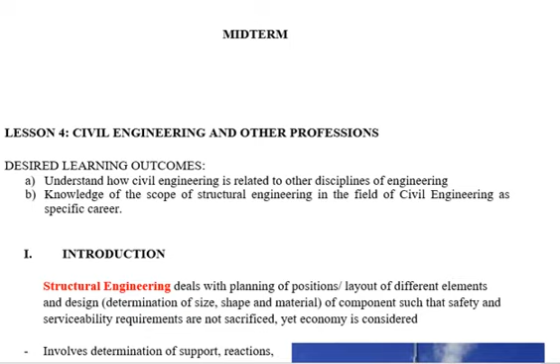Structural engineering deals with planning of positions, layout of different elements and design, determination of size, shape, and material of components such that safety and serviceability requirements are not sacrificed, yet economy is considered. It involves determination of support, reactions, member forces and moments, deflection and deformations.

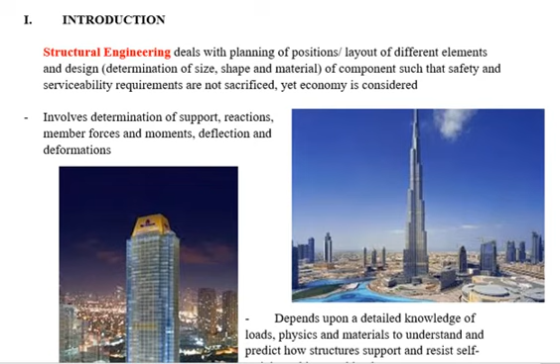As you go along in your higher years, there's a subject called structural analysis and design. You will be familiar with the terms support, reactions, forces, moments, deflection, and deformations. These are mostly what a structural engineer computes or analyzes for an infrastructure.

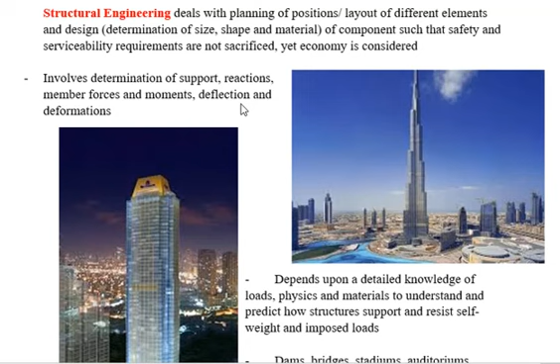Okay, so this picture is one of the tallest buildings in the whole world. I think you're familiar with this building. It's called the Burj Khalifa, located in the Middle East.

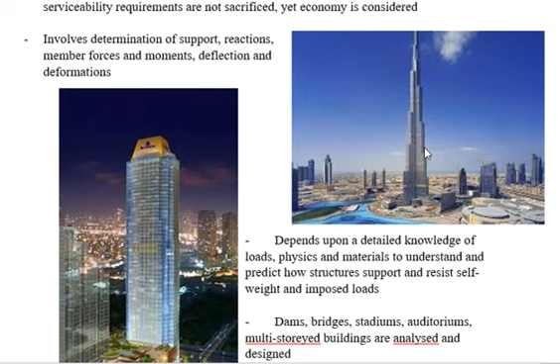Structural engineering depends upon a detailed knowledge of loads, physics, and materials to understand and predict how structures support and resist self-weight and imposed loads. So you should be knowledgeable about loads, how they are computed.

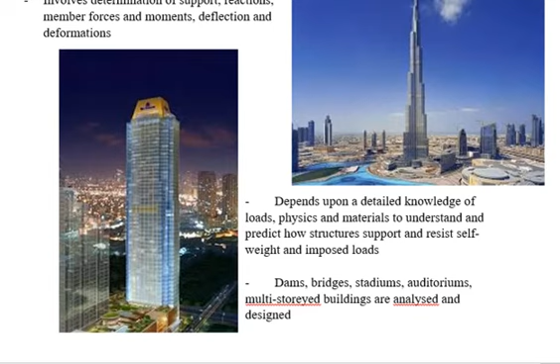So iyon ang halimbawa ng importance ng isang structural engineering. So dapat ang isang building, kahit gaano pa siya kaganda, makatayo siya sa sarili niyang mga paa. Which is, paa is pundasyon naman sa structures. So iyon yung importansya ng structural engineering sa construction.

Okay, so let's go to structural engineer. Structural engineer ensures that the design satisfies a given design intent predicated on safety or serviceability, and is responsible for making creative and efficient use of funds and materials to achieve these goals.

Okay, so who among you wants to become a structural engineer? Meron ba? I hope sana meron. Kahit at least mga 5.

So when you choose structural engineering or a structural engineer, most probably yung mga company na pwede nyong applyan is mga consultancy firm na mga company. Usually sila international base, nag-o-office lang sila sa Philippines pero yung mga company is international na mga pangalan, which is nagde-design sila ng iba't ibang mga infrastructure around the world.

So yun nga, as structural engineer dapat i-satisfy mo yung mga set of standards or codes galing sa iba't ibang mga agency, gaya ng Building Codes of the Philippines, then may mga codes din from National Structural Codes of the Philippines. Meron din yung mga sa Association of Structural Engineer yata, meron din mga codes na sinusunod.

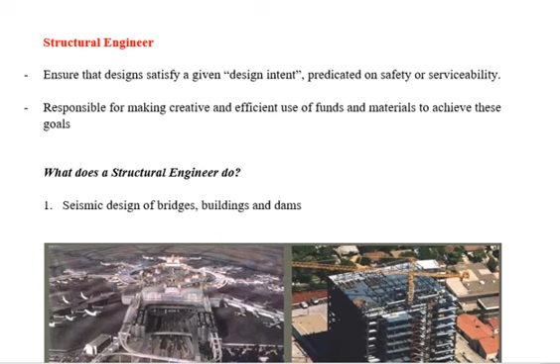So what does a structural engineer do? Number one, ginagawa nila is seismic design of bridges, buildings, and dams. Dapat yung mga bridges, buildings, mga dams na tinatayo can withstand the seismic or yung mga earthquake load. Kumbaga pag dumating ang isang lindol, hindi siya basta-basta bibigay o magko-collapse.

Kasama rin dyan dapat yung sa tinatawag na liquefaction, kung saan yung lupa is masyadong saturated na pwede siyang mag-cause ng collapse once na magkaroon ng lindol. One example of liquefaction is katong may isang building somewhere in Manila yata na after lumindol nag-collapse siya sa pundasyon. But yung structure mismo is buo pa rin. Ang bumigay lang yung pinaka ibaba o pundasyon. That's because of the liquefaction.

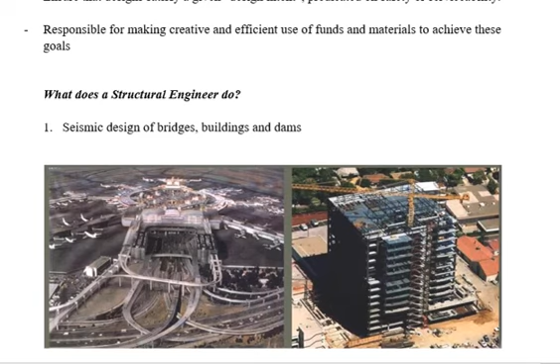Daming pressure, no? Then pag nagka-earthquake pa, dapat kaya niya yan i-withstand lahat, kumbaga dapat hindi siya basta-basta tutumba. Sobrang daming pressure. Kaya nyo ba yun? So ano sa tingin nyo? Okay ba ang structural engineering?

So try to evaluate yourself kung okay ba siya para sa inyo. Kumbaga malaki ang kitaan pag structural engineer ka, kasi limited lang, kakaunti lang ang nagiging structural engineer sa Philippines. Halos karamihan ng mga civil engineer pagka-graduate o pagpasa ng board exam ay andun sila sa mga general applications ng civil engineer. So iba talaga pag meron kang specialization o under ka sa specialized structural engineer.

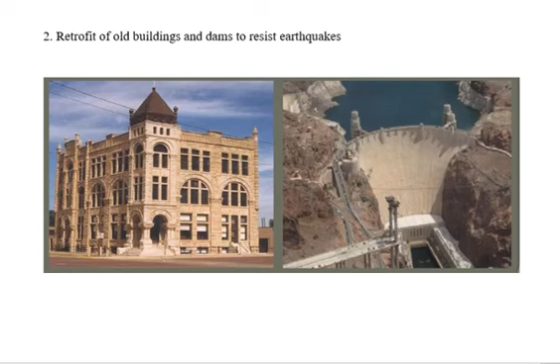Okay, so next, brief history. Structural derives from the Latin word structus, which means to pile, build, assemble. Parang Lego, pile mo muna, build mo, then assemble. The first use of the term structure was dated c. 1440. So structural engineering dates back to 2700 BC, before Christ, when the step pyramid for Pharaoh Djoser was built by Imhotep. So this is the step pyramid.

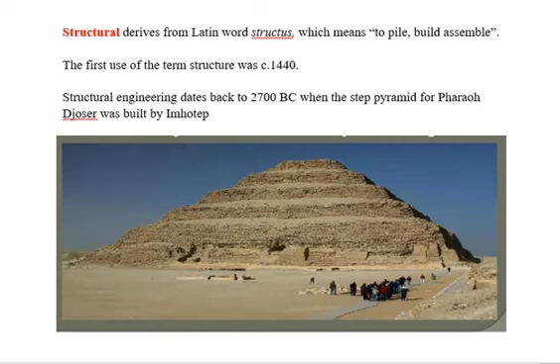Okay, so next - who is the pioneer of the use of iron in structural engineering? That is Mr. Gustave Eiffel. One of the structures he built, which I think you're familiar with, is in Paris - a famous tourist attraction called, from his name, the Eiffel Tower.

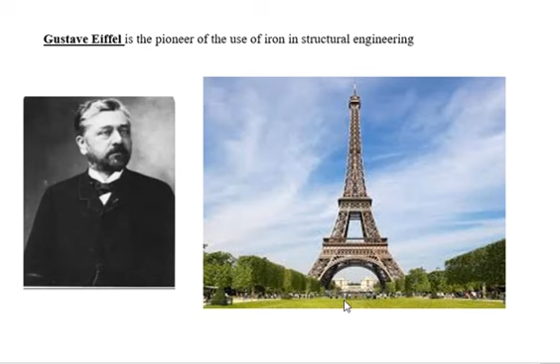Okay, so next - structural analysis. When you go to your higher years, you'll have a subject called structural design or structural analysis. This is mostly what a structural engineer does. In structural analysis, it's about developments in understanding materials and structural behavior.

In the later part of the 20th century, developments have been significant, with topics such as fracture mechanics, earthquake engineering, composite materials, temperature effects on materials, dynamics and vibration, fatigue, creep, and others. The increasing range of different structures and their increasing complexity has led to increasing specialization of structural engineers.

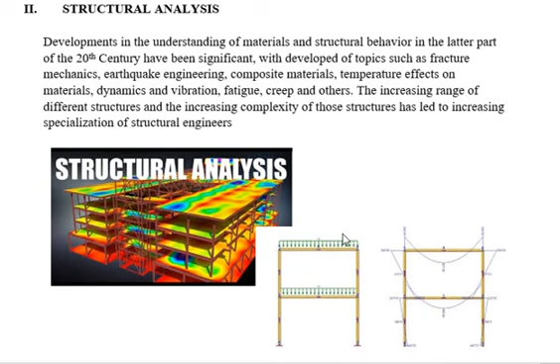Okay, let's go to structural failure. Structural design for a building must ensure that the building is able to stand up safely, able to function without excessive deflections or movements which may cause fatigue of structural elements, cracking or failure of fixtures, fittings, or partitions, or discomfort for occupants. It must account for movements and forces due to temperature, creep, cracking, and imposed loads.

For a system that obeys Hooke's Law, the extension produced is directly proportional to the load. If it exceeds this, the structure is called a failure structure. So usually during design, one of the computations is the load that gets analyzed.

So kapag nag-design ka, dapat yung mga members mo, structural members or elements, can withstand those loads. Dapat kaya niyang i-carry. Kumbaga sa tao, ano lang yung maximum na pwedeng buhatin ng isang tao, which I think times 2 lang sa kanyang weight. Kung times 3 na sa weight ng tao yung kanyang dinadala, ano mangyari sa tao? Magpipeli siya, babagsak. So ganun din yung structural failure. Kung ano lang yung kaya niya, capacity niya na i-carry, yun lang yung dapat. Pag sumobra doon, magkakaroon na ng structural failure.

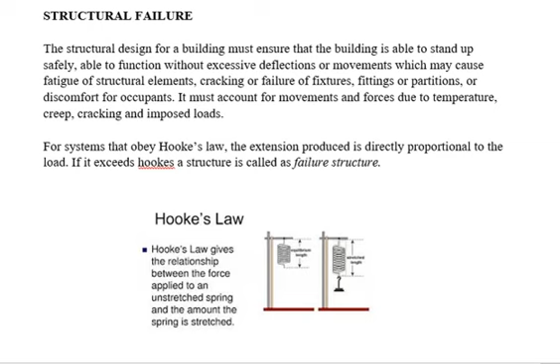Okay, so next. Structural elements - these are some examples of failure modes. So we have the stress. Ito yung mga modes of failure: deflection, buckling, creep, fracture, wear, and yielding.

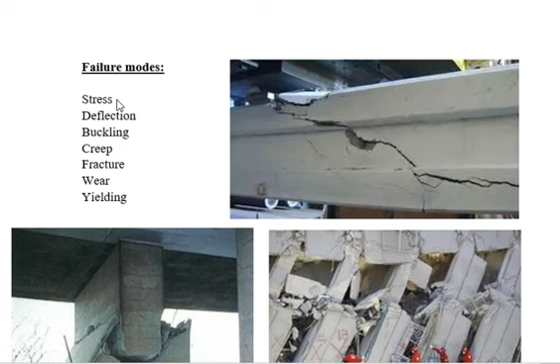So stress, kapag na-stress ka na, nagkakaroon na ng failure. Tama? Yes, so huwag ka magpapa-stress.

Deflection. Itong mga modes of failure will be discussed to your higher years sa inyong design, so we will not go into details. I will just show you some examples of those failures.

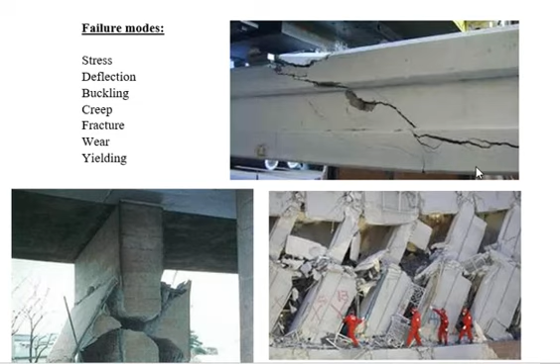So kita nyo yung beam, nagkaroon ng crack, which is due to stress, wear, or yielding. So ito naman yung poste, bumigay yung kanyang sa gitna. Then this structure, yung mga columns din niya bumigay. So this may be because of earthquake.

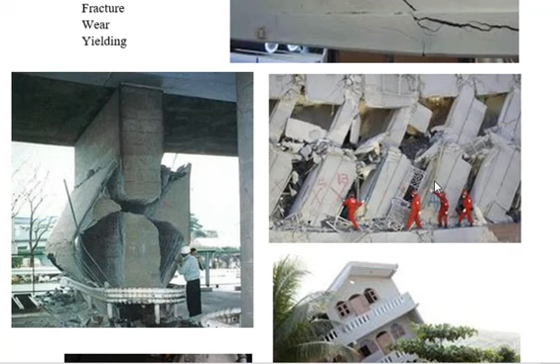Okay, another failure modes, so ito. Yung beam din, ito, buckling and yielding and creep. Sama-sama siya dito. Then etong bahay, ang tibay nung structure niya, pero ang bumigay sa kanya is yung kanyang pundasyon. Maybe that's because of liquefaction or yung soil bearing capacity ng lupa is hindi sumobra.

Then this other picture is naman sa bridge. So hangga't maaari, ito yung mga iniiwasan na mangyari ng isang structural engineer. Pero meron yung mga time na hindi maiiwasan na kahit gaano kalakas or yung design mo, bibigay at bibigay pa din.

So parang relasyon ulit. Kahit gaano ka-strong relationship kayo, pag dumating yung tukso, bibigay at bibigay pa din. Diba? Tama? So ganun din yun. So parang relatable ang structural engineering sa buhay-buhay, mga buhay pag-ibig ninyo.

Okay, let's go to next lesson. Structural elements - what are the structural elements composed of a building or structure? Number one, ties. A tie is a member that is subjected to axial tension forces only. Load is applied to ties only at the ends, so ties cannot resist flexural forces. Ito yung makikita nyo sa mga columns. Check nyo lang sa internet sa itsura ng ties.

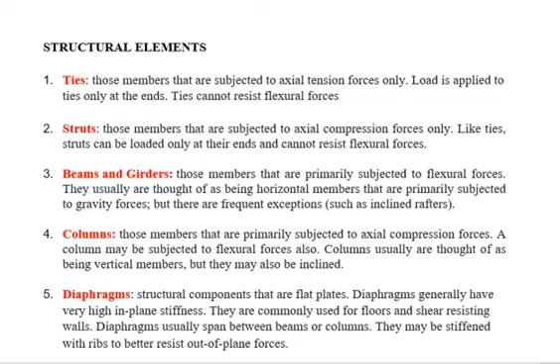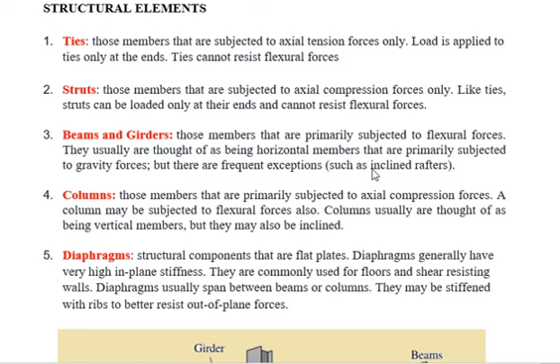Okay, another element is the beams and girders. These are members that are primarily subjected to flexural forces, so they usually are thought of as being horizontal members that are primarily subjected to gravity forces, but there are frequent exceptions such as inclined rafters. I'm sure familiar mo sa beams and girders, so ito ang example sa beams, girder. Girder, ano rin yan? Beams. Tinawag lang siyang girders para i-define na siya as a main beam. Usually sa beams maraming tawag dyan, iba-iba.

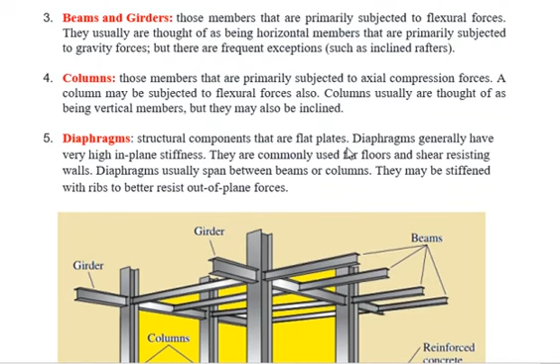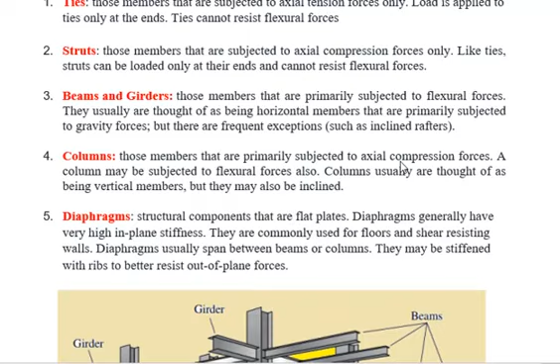So next, columns. Those members that are primarily subjected to axial compression forces. A column may be subjected to flexural forces also. Columns usually are thought of as being vertical members, but they may also be inclined. So this is the column, yung mga nakatayo. Flexural forces dito sa taas or sa baba. Then pwede rin sa axial or flexural forces din dito.

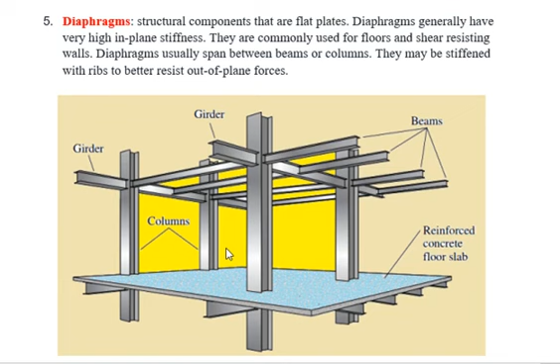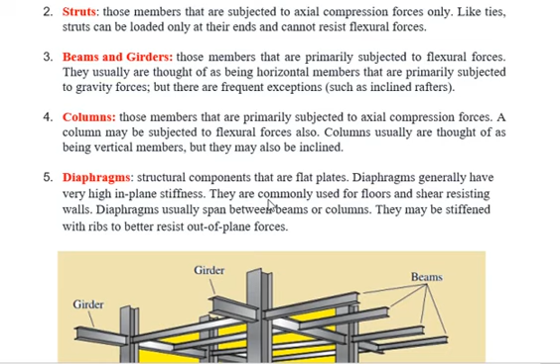Okay, then we have the diaphragms. Diaphragms are structural components that are flat plates. Okay, so ayan sa diaphragm, no? Okay, next.

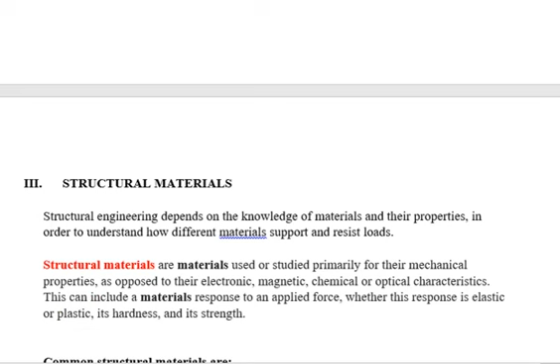Okay, let's go to structural materials. So what are the structural materials? Structural engineering depends on the knowledge of materials and their properties, in order to understand how different materials support and resist loads.

Structural materials are materials used or studied primarily for their mechanical properties, as opposed to their electronic, magnetic, chemical, or optical characteristics. This can include a material's response to an applied force, whether this response is elastic or plastic, its hardness and strength. Of course, when you design, it still depends on the materials you will use. Different kinds of materials have their own advantages or disadvantages depending on where you use them, which part of the structure you'll use them for.

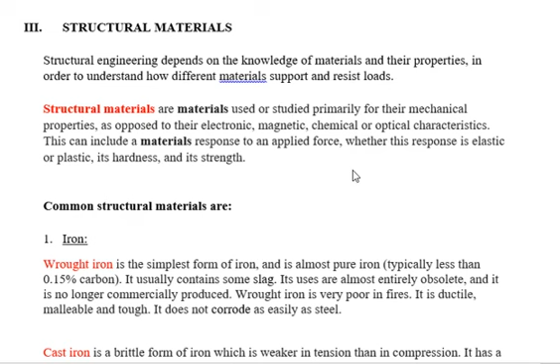So what are those common structural materials? First is iron. There are many types of iron, so it's not just plain iron. One type of iron is wrought iron.

Wrought iron is the simplest form of iron and it is almost pure iron, typically less than 0.15% carbon. So it's pure, solid iron, but it usually contains some slag. Its uses are almost entirely obsolete and it is no longer commercially produced.

Wrought iron is very poor... it is ductile, malleable, and tough, so it does not corrode as easily as steel. Mostly it's not used anymore nowadays. I think it was used before in pipes. Now it's not commercially available in the local market. It's phased out, so to speak.

Another type of iron is called cast iron. It is a brittle form of iron which is weaker in tension than in compression. By the way guys, I think you're not yet familiar with the terms tension and compression. As you go through your structural analysis, you'll discuss what is tension and what is compression.

To give you an overview, tension is usually a force, like the word pull or hila. When you pull a door, for example, what force are you exerting? That's called tension, the pull. If it's push instead, that's called compression.

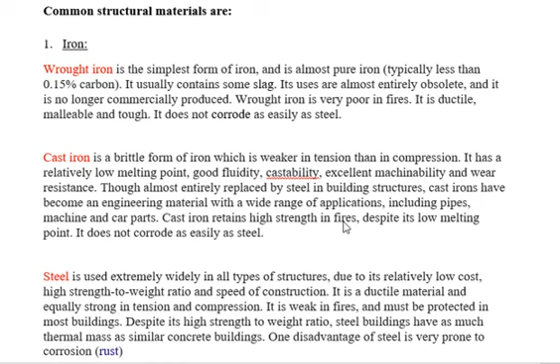It doesn't melt easily. Okay, another type of iron is steel. Steel is used extremely widely in all types of structures due to its relatively low cost, high strength to weight ratio, and speed of construction. It is a ductile material and equally strong in tension and compression. It is weak in fires and must be protected in most buildings.

So how do we protect steel? It's added on with concrete. Despite its high strength to weight ratio, steel buildings have as much thermal mass as similar concrete buildings. One disadvantage of steel is it's very prone to corrosion.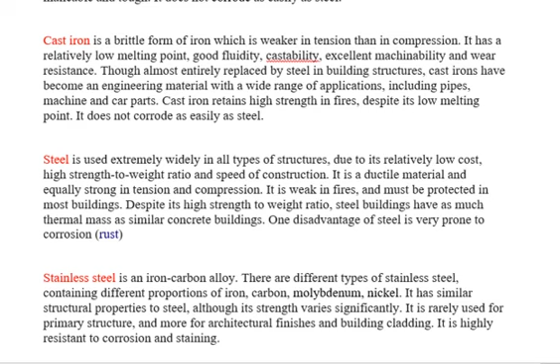Another material to consider for structural design is concrete. I'm sure you're familiar with the term concrete. Concrete is used widely in building and civil engineering structures due to its low cost, flexibility, durability, and high strength. It also has high resistance to fire. Concrete is a non-linear, non-elastic, and brittle material. It is strong in compression and very weak in tension.

It can resist compression forces. That's why concrete is sometimes reinforced with steel, because steel has very high resistance to tension. They should always be partnered together - concrete and steel. Your concrete is useless without steel. No matter how strong your concrete is, without steel it's useless, because concrete has essentially zero strength in tension, so it's almost always used as reinforced concrete.

Concrete is a mixture of sand, aggregate, cement, and water. You can't just mix sand, aggregate, cement, and water carelessly - it needs the right proportion or mixture to attain good quality concrete. It is placed in a mold or form as a liquid, and then it sets due to a chemical reaction between the water and cement. The hardening of concrete is called hydration. The reaction is exothermic, giving off heat.

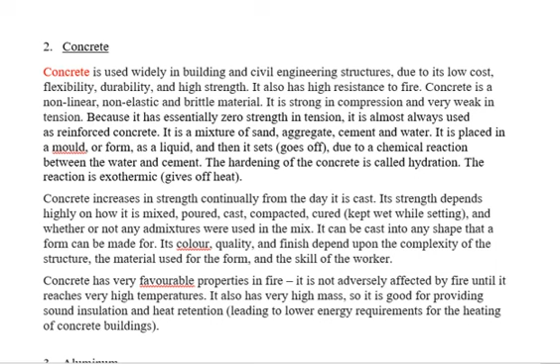I'm sure you've seen concrete before, so you're familiar with it. Another material considered in structural design is aluminum.

Aluminum is a soft, lightweight, malleable metal. Aluminum has one-third the density and stiffness of steel. It is ductile and easily machined, cast, and extruded. Corrosion resistance is excellent due to a thin surface layer of aluminum oxide that forms when the metal is exposed to air, effectively preventing further oxidation. The strongest aluminum alloys are less corrosion resistant due to galvanic reactions with alloyed copper.

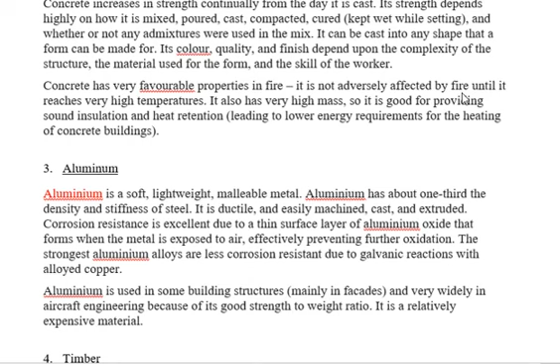Aluminum is used in some building structures, mainly in facades, and very widely in aircraft engineering because of its good strength to weight ratio. It is a relatively expensive material. Aluminum and stainless steel are different - they are not the same.

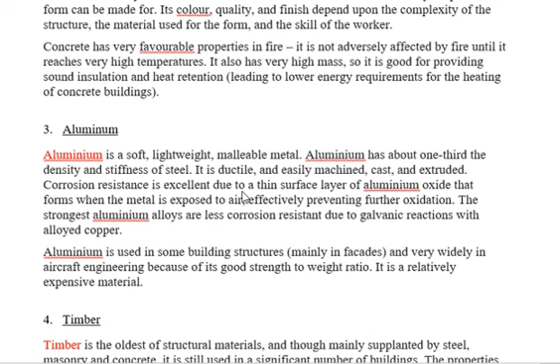Another type of material is timber, or wood, which is the oldest of structural materials and though mainly supplanted by steel, masonry, and concrete, it's still used in a significant number of buildings.

The properties of timber are non-linear and very variable, depending on the quality, treatment of wood, and type of wood supplied. Wood is strong in tension and compression but can be weak in bending due to its fibrous structure. Wood is relatively good in fire as it chars, which provides the wood in the center of the element with some protection and allows the structure to retain some strength for a reasonable length of time.

So ang pinaka matibay na wood I think is called ironwood, or magkuno, same lang bala sa balili tree, ang ganon. Another sa mga matitibay na kahoy is yakal, kamagong, yung mga yon. So I think yung mga ganong kahoy ay available pa sa mga bundok dito sa Mati City. Kahit nga dun sa amin malapit, sa mga bundok, marami pang ganong klase ng kahoy.

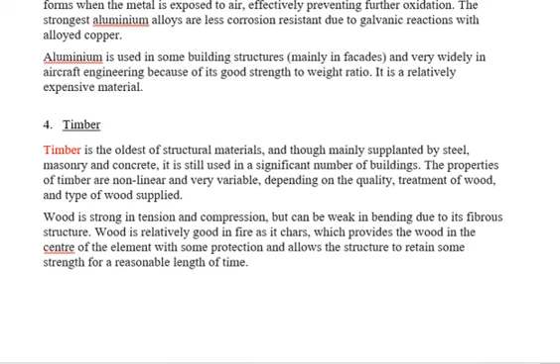So that's it, kaya I admire structures made of wood and timber. Ganun tignan, napaka-unique. Okay, so another materials is about composites.

Composite materials are used increasingly in bridges, especially for conservation of old structures. Composites are often anisotropic, they have different material properties in different directions. As they can be laminar materials, they most often behave non-linearly and will fail in a brittle manner when overloaded. So they provide extremely good strength to weight ratios but are also very expensive. The manufacturing processes, which are often extrusion, do not currently provide the economical flexibility that concrete or steel provide.

So the most commonly used in structural applications are glass reinforced plastic. Example ng mga composites yung mga fiberglass, plywood, mud bricks, glass which is reinforced by plastic. So yun ang mga materials na composites, they have different material properties.

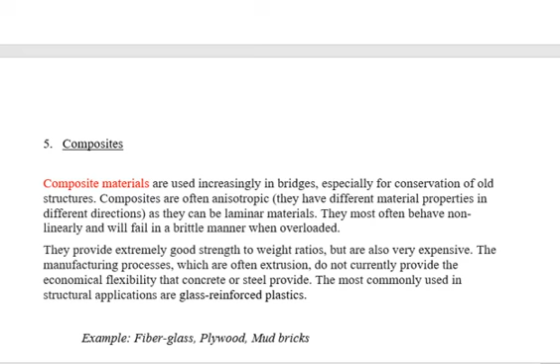Okay, so another is masonry. Masonry has been used in structure for thousands of years and can take the form of stone, brick, or blockwork, so stone is a type of masonry. Masonry is very strong in compression but cannot carry tension because the mortar between bricks or blocks is unable to carry tension. Because it cannot carry structural tension, it also cannot carry bending, so masonry walls become unstable at relatively small heights. Usually kapag nilalay yung isang masonry composed of bricks or concrete hollow blocks, usually may mga bakal pa rin, may reinforcement para makarry pa rin yung mga tension forces. Okay, I'm sure nakita naman ninyo ang mga masonry, mga riprap, mga bato, ganun.

So historically, masonry was constructed with no mortar or with lime mortar. In modern times, cement-based mortars are used, so the mortar glues blocks together. Ang galing no, glue lang ginagamit noong unang panahon sa pag-mortar ng mga bato. And also smooths out the interface between the blocks.

So merong mga interlocking, so ngayon meron na mga tinatawag na smart blocks o smart masonry blocks. O yung isa sa mga vlog ni Slater Young, yung light blocks na tinatawag niya, mas magaan siya kumpara sa hollow block. Marami ng bagong technology ginagamit para sa masonry, so hindi na lang hollow blocks. Sigurado ang iba dito ay hindi pa commercially available dito sa Mati, pero sa Manila, sa mga nagtrabaho kong company sa subdivision, marami ng kind of masonry blocks na ginagamit.

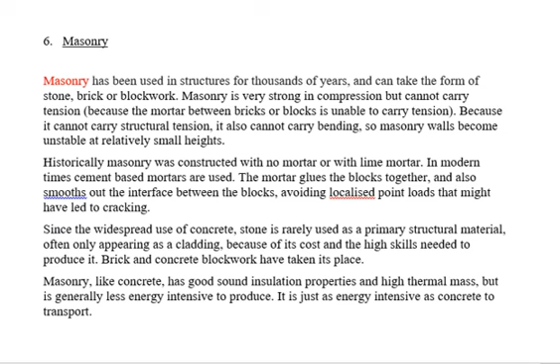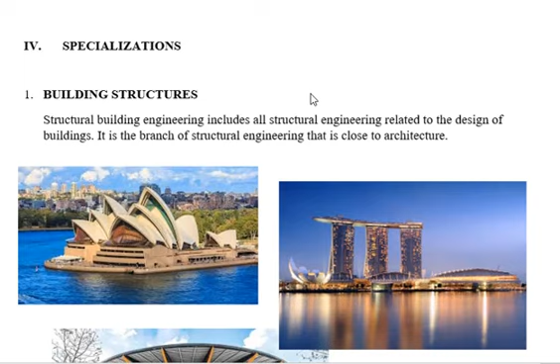Okay, what are the structural engineering specializations? Number one, we have the building structures. Structural building engineering includes all structural engineering related to the design of buildings. It's the branch of structural engineering that is close to architecture. So ito yung building structures.

Ito is Opera House sa Australia. Ito naman is Marina Bay Sands sa Singapore. And this is local lang, makikita sa Clark Sports Stadium. Ganda, no? So ito yung mga tinatawag na building structures.

Kumbaga itong mga structures na to ay very iconic sa kani-kanilang mga bansa. So hopefully in the future, isa sa inyo makapag-design ng mga ganitong klaseng structures. Good luck with that.

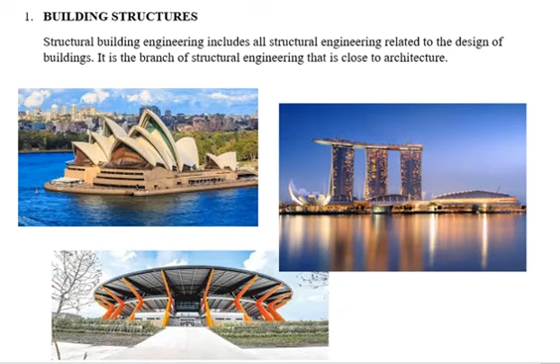Very iconic. Hopefully sa Mati rin sana magkaroon ng ganitong iconic na structures na kayang i-withstand yung earthquake, since ang Mati ay lies on a fault line. I think mayroong tatlong fault line sa Mati. So that is the challenge for structural engineering. Kaya if you can notice, wala masyadong matataas na building sa Mati because of the fault line.

So what is another specialization of structural engineering? We have the earthquake engineering structures. Earthquake engineering structures are those engineered to withstand various types of hazardous earthquake exposures at the sites of their particular locations. So kapag nagkaroon ng lindol...

Ito with vibration control devices, ito without. Kung nagkaroon doon ng lindol, nakikita niyo itong mga forces na to. Ito yung mga walang vibration control devices, ang laki ng movement ng isang building, compare sa mayroong mga vibration control devices, na very minimal lang yung galaw niya.

Ang galaw naman ng building pag nagkaroon ng lindol, parang sumasayaw yan eh. Itong nasa right portion is an example of earthquake resistance engineering structures. It is like a pendulum, na once na magkaroon ng lindol, kumbaga i-resist niya yung movement ng earthquake. Kumbaga nagkaroon ng tsa-tsa, magtsa-tsa lang siya.

Itong vibration control devices makikita sa highest building sa Taiwan, which is Taipei 101. Nandun siya sa pinaka-top. Magkaroon ng lindol, siya yung taga-resist nung earthquake forces. Okay, try to research this vibration control devices or Taipei 101. I think mapapanood niyo siya sa Discovery Channel or sa BBC, yung mga mega structures.

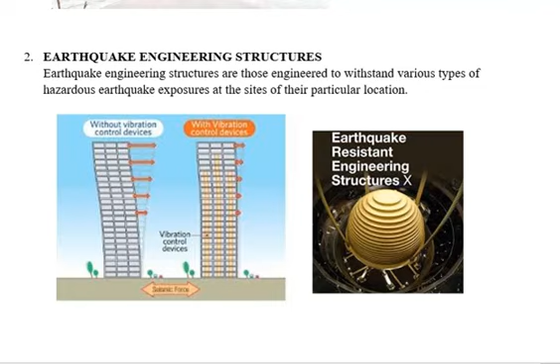na pag nagkaroon ng lindol sumasayaw. Or na-try niyo naman punta sa mga mall or sa G-Mall sa Davao sa malaking building na pag may dumaan na sasakyan parang pakiramdam niyo yumayanig yung floors. Ibig sabihin nun meron siyang vibration control devices, gumagalaw siya. Very plastic yung structure.

Okay, so next we have the civil engineering structures. Isa pang specialization ng structural engineering na related sa built environment. Ito na yung sa construction, which is another is the bridges, dams, roads, railways, pipelines, power stations, and tunnels. So those are some of the civil engineering structures na under ng structural engineering.

Kumbaga ito yung mga structures na very needed sa society or in nation building. So pag meron ka ganitong structures, ibig sabihin progressive ka na nation. Lalo na kung railways mo is mga bullet trains. So hopefully sa Mindanao, meron na yatang mag-start next year, 2021, the Mindanao Railway Project, magmumula from Davao City, Tagum, going to GenSan or Zamboanga.

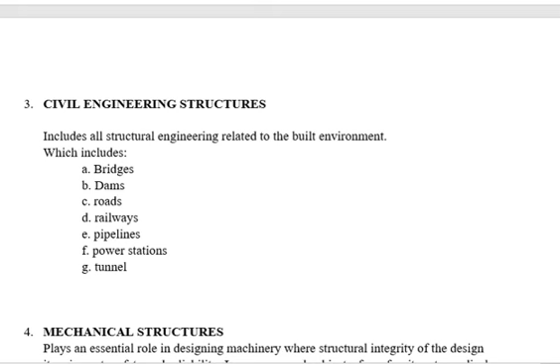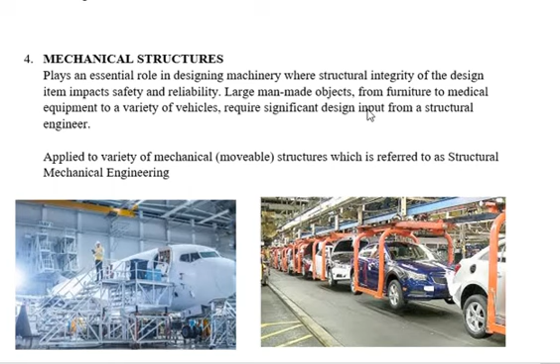Okay, so what are the other specializations? We have mechanical structures, which plays an essential role in designing machinery where structural integrity impacts safety and reliability. Large man-made objects like airplanes, vehicles, furniture, to medical equipment, requires significant design input from a structural engineer.

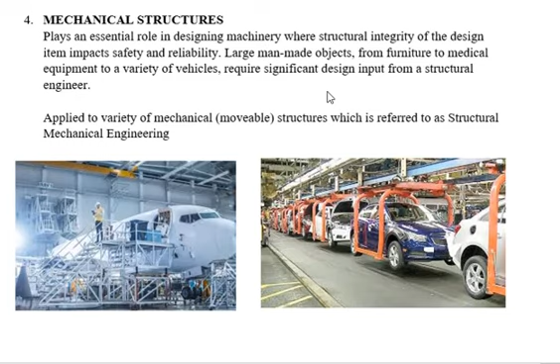So for your activity this week, it is a group activity. You need to prepare the following: walis ting-ting (tukog), 20 pieces rubber band, boiled egg, ruler or steel tape, electric fan, cell phone with video and internet capabilities. You need to prepare these, then read module number 4 for what you need to do.

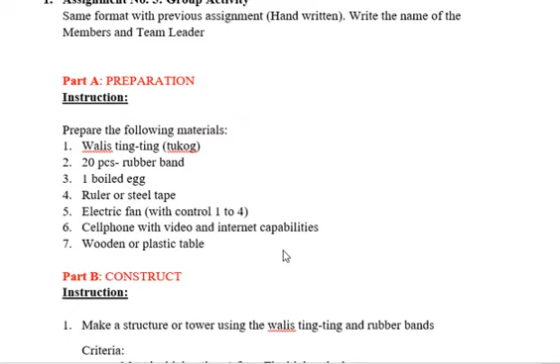For the preparation, the video should be recorded. Then you will make a structure or tower using the walis ting-ting sticks and rubber band. The criteria: it should be higher than 1 foot, the higher the better, so whoever has the tallest gets more score. Also, the egg must be able to rest and be placed on top without falling.

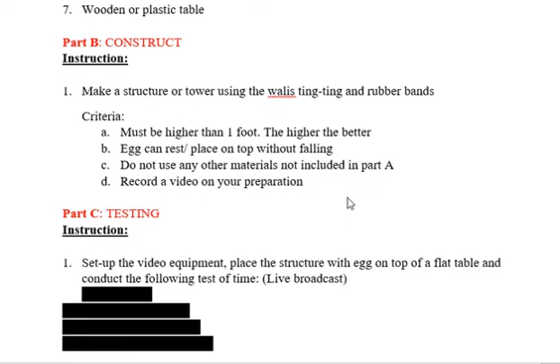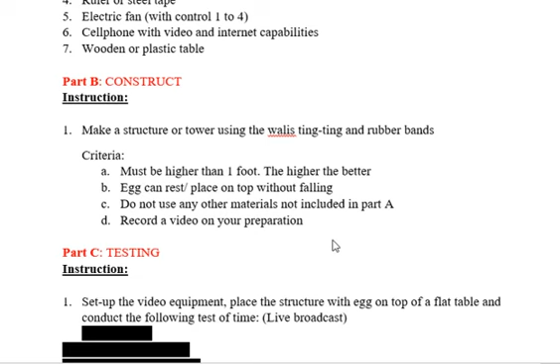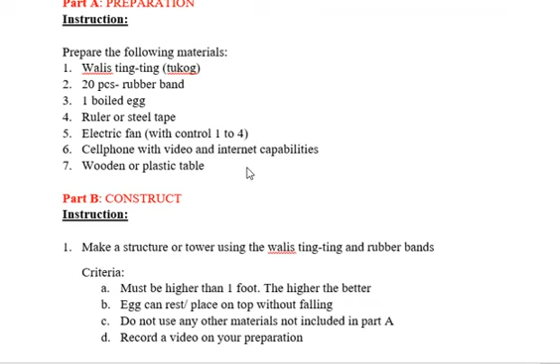Do not use any other materials not included in part A. Only these materials should be used, so you cannot use paper, glue, etc. Record video during your preparation, making sure all members of the group are together. That's why I grouped you according to your community, based on who's nearest to you.

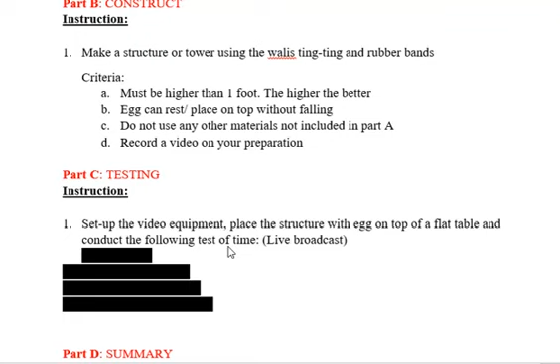Okay, for the testing, I'll reveal it once you've finished your structure. After 1 week, next meeting, this will be a live video presentation. Section A around 9 to 10, section B 10 to 11, section C 11 to 12. It will be live, so make sure you have a good internet signal. For the summary, you will describe your learning from the activities.

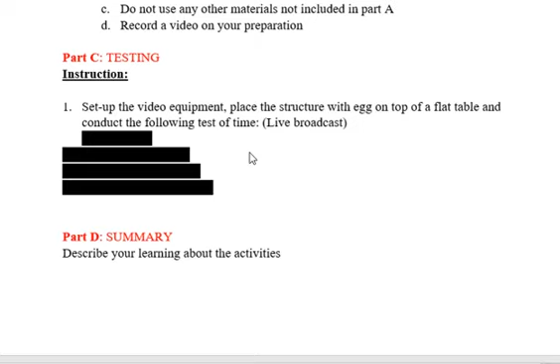We have height and design worth 20 points, design 10 points, and testing 30 points. For height, the tallest structure gets 20 points, the second tallest gets 17 points, third gets 14, fourth gets 11, and for the 5th to 9th, other groups automatically get 8 points.

For design, the first gets 10, then 8, 6, etc. For testing, you need to pass all the tests; there are 4 tests to pass. If you pass all 4 tests, you get 30 points. If only 3 tests pass, you get 25. If 2 tests, 20. If only 1, 15. And if none of your tests pass, meaning your structure collapses on the very first trial, you only get 10 points.

Okay, so let's prepare your structure and see you at the next meeting.